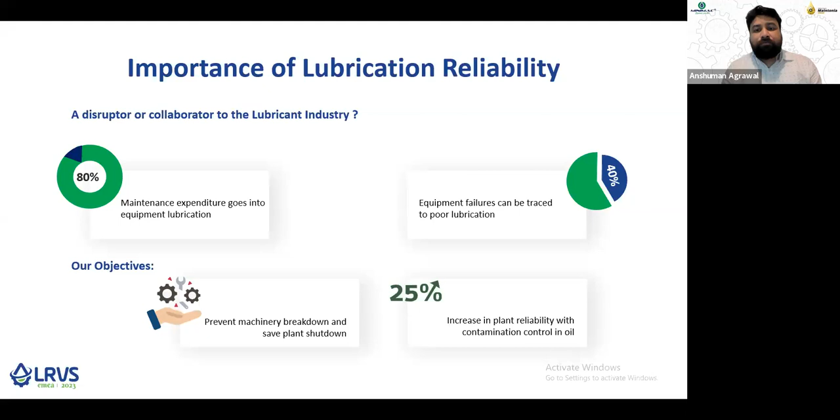For this, they have a very strong objective. Almost all industrial sectors today have an objective of reducing breakdowns in their machineries by 25%, because it's a known fact that around 80% of the maintenance expenditure of an equipment goes into lubrication-related aspects, and around 40% of equipment failures are because of poor lubrication aspects.

So there are three wings of lubrication reliability. The first one is lubricant selection, the second is lubrication handling, and the third one is analysis and contamination control.

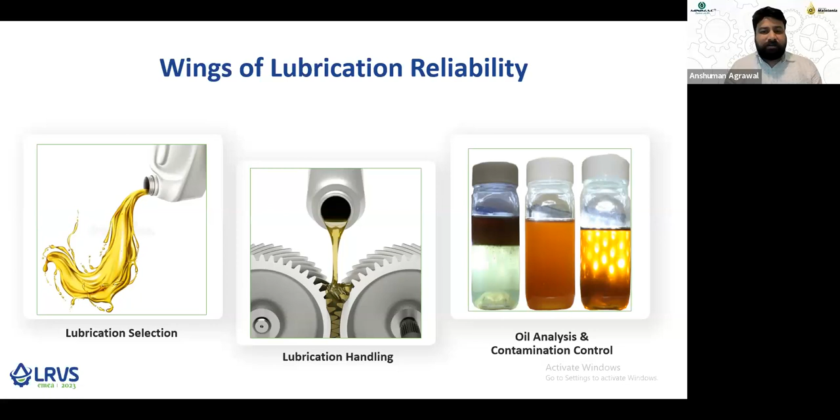We talk about all of these concepts under the GHG protocol. There are three major scopes under the GHG protocol. This is a standard protocol applicable to all industries across the globe. Scope 1 is the direct scope, scope 2 is the indirect one. If you increase the efficiency of your plant, and increase the resources and fuel resource utilization in your plant, you're going to have a better scope 1 and scope 2 initiative.

However, these do not constitute the majority portion of the total CO2 impact that a company can have on the environment. The major portion is actually scope 3 — scope 3 on the upstream side and scope 3 on the downstream side, which are the indirect scopes. For example, on the downstream side, for lubricants, there are certain scopes like the use of sold products, the end-of-life treatment of various sold products, and the processing of sold products.

So if lubricant is considered as a product or a material, what is its end use? What happens after its usage, or your entire life cycle is over? Is it disposed? Is it incinerated? Or is it used for landfill? So what happens with the used lubricant? That is the point of contention out here.

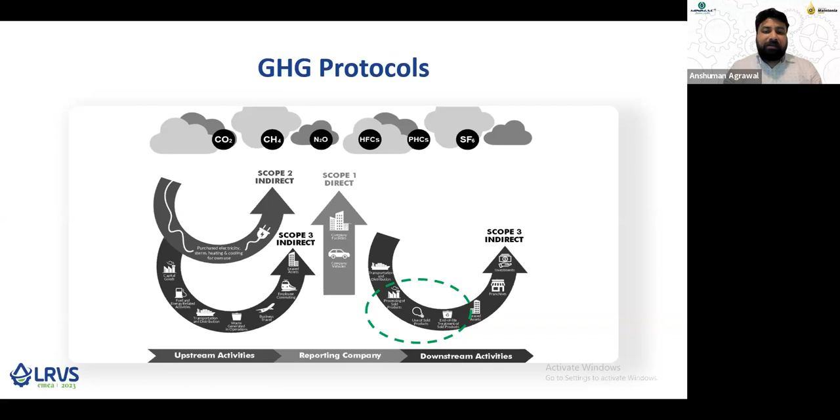This is the area of improvement where companies need to work, because used lubricants today possess a hazard worth a 1:10 or 1:11 ratio. So any used lubricant, if disposed of in an unorganized manner, if it is not brought back into the supply chain, into the re-refining process, that lubricant possesses a huge amount of emissions.

In order to explain it, we have a short video which I would like to present to our audience.

Lubrication is vital for smooth machinery operation. It reduces friction, minimizes wear and tear, and extends the lifespan of equipment. But did you know that adopting lubrication lifecycle management is crucial for achieving a circular economy and a sustainable environment to reach net zero goals? Let's visualize the journey of lubricants from production to disposal and see how Minimac contributes to this cycle.

Oil, in its raw form, is categorized as virgin oil. It goes through lube blending plants, where it becomes industrial oil. This oil is then transferred to oil storage yards using large tankers and barrels. The industrial oil is extensively used in machinery, enduring rigorous testing and wear and tear.

As it nears the end of its useful life, it becomes used oil, which is collected and segregated in different oil storage tanks. Waste oil, a blend of various used oils, is stored in a separate tank. Unfortunately, a major bulk of waste oil is currently disposed of, generating hazardous waste and depleting the environment, whereas a very nominal amount goes for re-refining. This practice contributes to the emission of carbon dioxide.

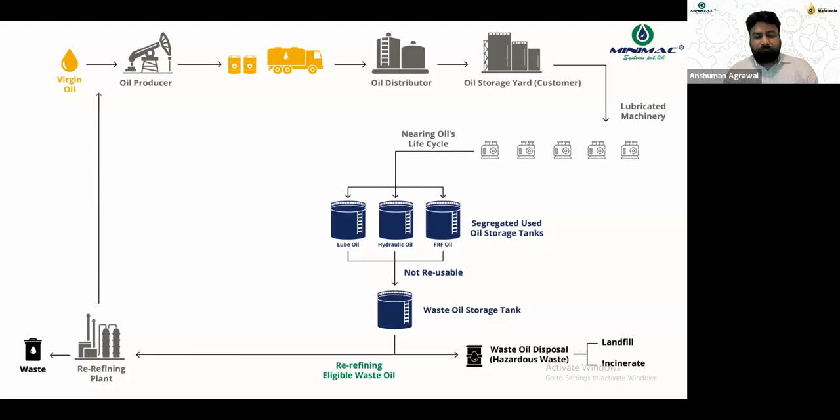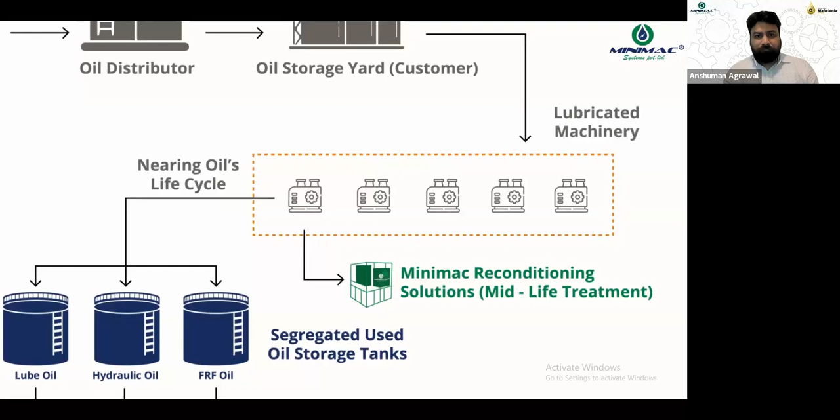Here's where Minimac Systems steps in to build a circular economy in a sustainable environment. Minimac proposes a mid-life treatment, which involves a recurring purification of oil used in the tanks over the years, reducing new oil requirements and hazardous waste generation, in turn increasing the drain interval and introducing the concept of nano-circularity.

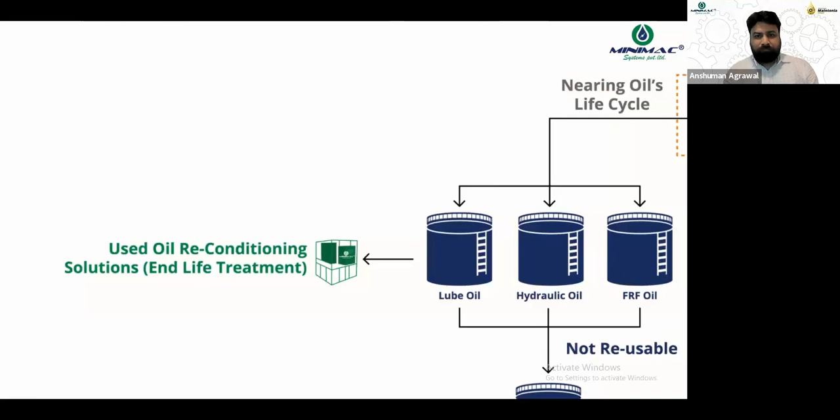Minimac's second offering is the end-of-life treatment, providing used oil reconditioning solutions. This promotes the reuse of oil and is termed micro-circularity. Currently, the major percentage of waste oil is incinerated or disposed of as hazardous waste.

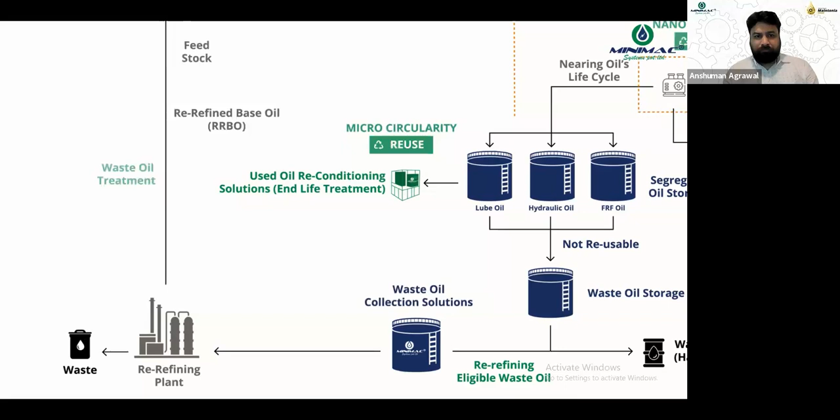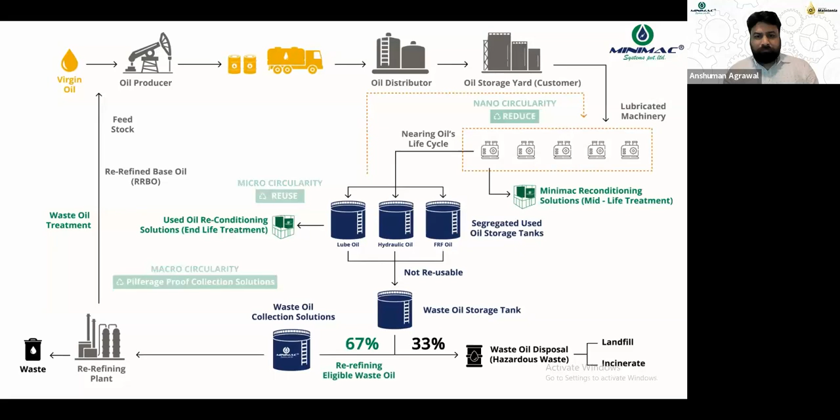Minimac's third offering is waste oil collection solutions, where the waste oil is transported to re-refining plants. It is converted into re-refined base oil, RRBO, to be used as a feedstock for oil producers, bypassing emissions and promoting macro-circularity, with an aim to provide pilferage-proof collection solutions. By implementing these solutions, the feedstock contributes to reducing a significant amount of carbon dioxide emission emitted by waste oil disposal. This comprehensive cycle helps us move towards net zero and a better, sustainable tomorrow.

By reformation, we mean to say the overall usage of lubrication and lubricant products needs to be replaced with a better procedure and a better practice, which is known as total fluid management or lube management solutions.

In order to reduce the generation of waste lubricants, as the animation suggested, we need to perform mid-life treatment of the lubricants. By mid-life treatment, we mean lubricants do catch contamination and degraded products, because of which they tend to lose their properties and are wasted or discarded much before their designed life. We propose regular mid-life treatments so that lubricant properties can remain intact for the entire designed life of the lubricants.

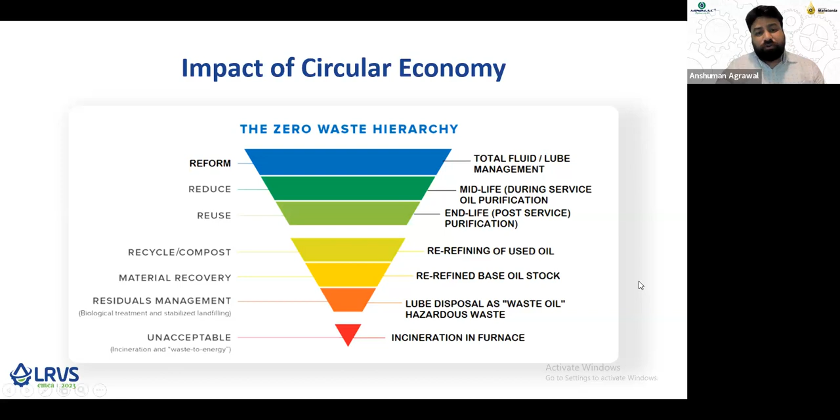So this impact of circular economy is well known and beneficial for all the stakeholders in the entire ecosystem of lubrication. The first is the lube user, the factory owner, where the lubricants are being used for various applications. They have two major benefits.

The first is reduction in oil purchase, which enables a better cost advantage to them. At the same time, it adds to the environmental benefits because when you do not purchase the lubricant, you do not have any scope 3 indirect emissions.

Second, the reduction in oil waste disposal. When you have the lubricant life improved and enhanced, naturally the oil wastage goes down drastically, thereby your emissions against scope 3 on the downstream side also have a major impact.

For a lube company dealer or sales partner, there are multiple benefits if they get into the business of lubricant services. The first is value-added services for their offerings. They find better customer loyalty and better penetration in customer premises because they can do round-the-clock service. Thereby they can create a differentiated offering for their customers rather than the commoditization which has happened right now.

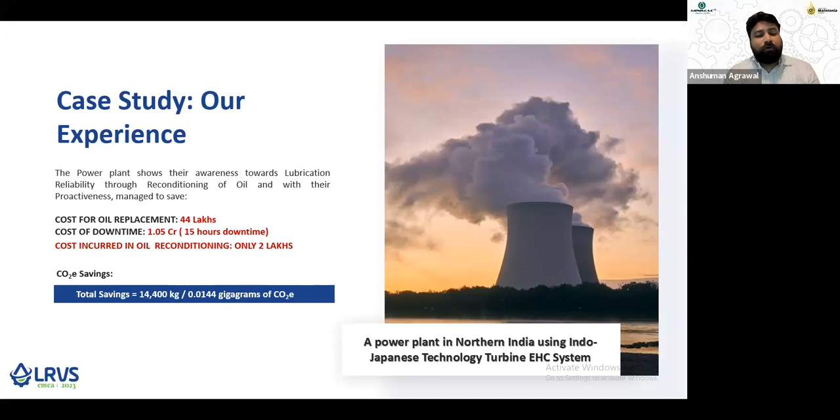And they were about to change the entire lubricant, the entire lube oil quantity was being disposed of. So our team chipped in and we recycled the lubricant out there back to its original properties, thereby saving around 14,000 kilograms of CO2e abatement.

The second case study is from another power plant, wherein the overall cost for oil replacement was around 21 lakhs of Indian rupees. But more than that, the overall impact of changing the oil on the environment was huge, and it stood at around 15,000 kilograms of CO2e, because if the oil was disposed of, the amount of CO2e calculated was around 15,000 kgs.

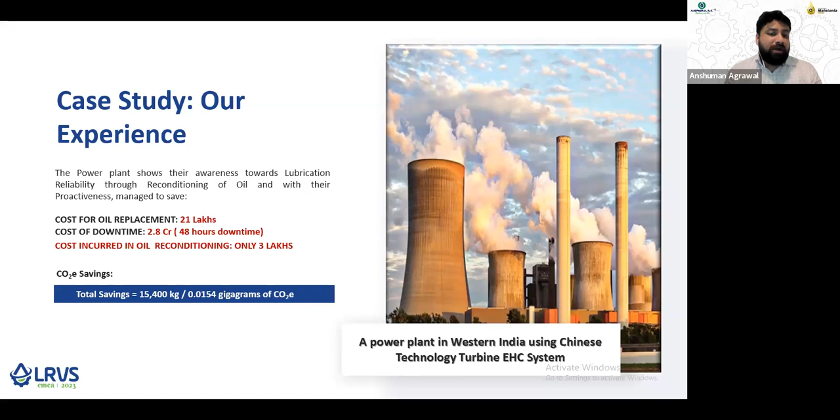So at this particular plant as well, when the oil was reconditioned, it was brought back well into service, and this happened around 5 years ago, and since then the plant has been running with perfectly no issues.

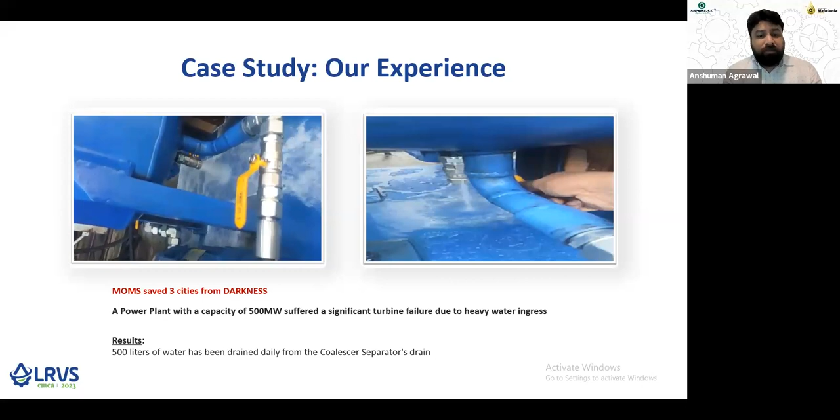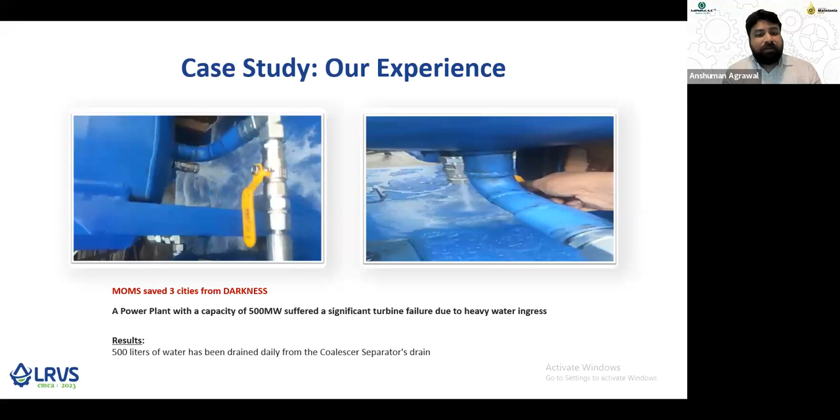During this period, around 500 liters of water was drained on a daily basis. Because of this, the shutdown was averted, and 3 cities were avoided from going into darkness.

So this is all from my side, a short presentation, but I believe it would be good enough for sensitizing the audience on this topic of circular economy around lubrication practices. I would like to invite any questions from the audience. If you would like to chip in the QA box, that will be better for Anas to guide me through. Thank you so much for hearing me out so patiently. Over to you, Anas.

Thank you. We have a request, not a question. Someone, Carlos, is asking for the source, like in the beginning of the presentation you mentioned something about the emissions and the percentage of the emissions.

Right, so there is a lot of global data available on global emission websites, wherein you can find out, against every material which is being produced, what is the net amount of CO2e which can be considered for the calculation of life cycle assessment of a particular product, commodity, or material. So these data have been taken from global directories around emissions, emissions for producing a new lubricant, and emissions for disposal of a waste lubricant.

Right, I have a question here. It says, I find this highly interesting. The question is asking, is there any third-party reports or data from these case studies, the ones that you presented?